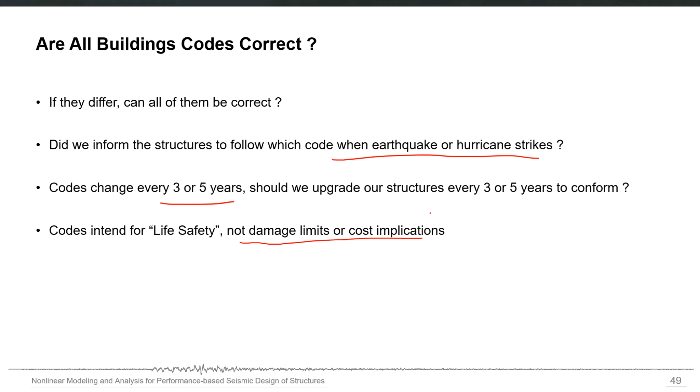Sometimes, especially in underdeveloped or developing countries, they follow different building codes. The practice is mostly governed by more than one code, so there is no consensus about which code to follow. In this case, these questions become more meaningful or significant—what should we do about these codes?

Prescriptive building codes behave like a shelter, because the public is concerned only with one question: will the building be safe? The owner of a particular building will have very specific questions, related to the performance of the building, not about what analysis procedure is being used or what code provisions are being followed. So his question will be very performance oriented.

For example: will the building collapse? Will it be damaged in case of a future earthquake? If that much level of earthquake comes tomorrow, will my building be able to survive? How much repair cost will be required in case of that much level of earthquake? How much time will it take to repair? Can I make a building that will not be damaged and will not collapse in a particular earthquake?

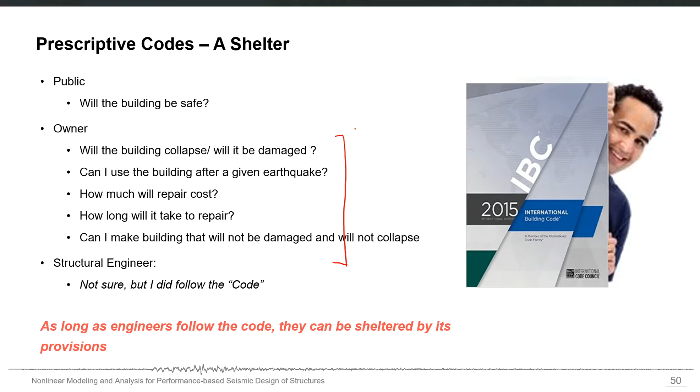Structural engineers, on the other hand, cannot answer these questions explicitly. All they can say is, 'we are not sure, but I did follow the code.' That's why the code serves as a shelter for structural designers—they use it not to answer the explicit questions of building owners, but to safeguard themselves. So as long as engineers follow the code, they can be sheltered by its provisions. The building code implicitly ensures that the performance of the structure will be acceptable if its rules are followed.

The performance may not be acceptable in certain cases. After every big earthquake, we've learned that there are certain things building codes may miss, or certain aspects in which they have limitations. The actual performance of buildings during real earthquakes has shown several limitations in building codes. So after every such realization, we end up changing the rules every few years based on updated understanding, or inventing new rules for updated versions of the building codes, and this process continues as our understanding of these structures increases.

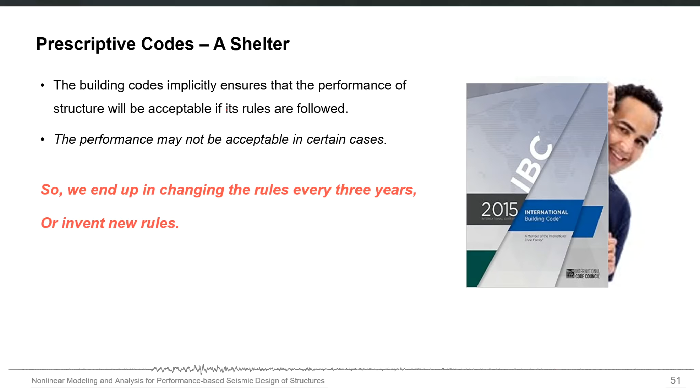Some of the shortcomings we can highlight now are mostly related to the design of tall buildings. For example, most traditional building codes govern the design of normal buildings, such as low-rise and mid-rise buildings. They are not specifically developed for high-rise buildings, and they are prescriptive in nature. The structural systems you can use are limited. I will explain this point in a moment. And it is based on the elastic method of analysis, which is not realistic.

We know already that structures behave inelastically. The real behavior is non-linear, but the code methods are based on elastic methods only. They enforce uniform detailing rules and unreasonable demand distribution rules, for example, and they do not take advantage of recent computing tools. Even though nonlinear modeling or inelastic analysis has become very easy nowadays, the methods are still based on elastic analysis.

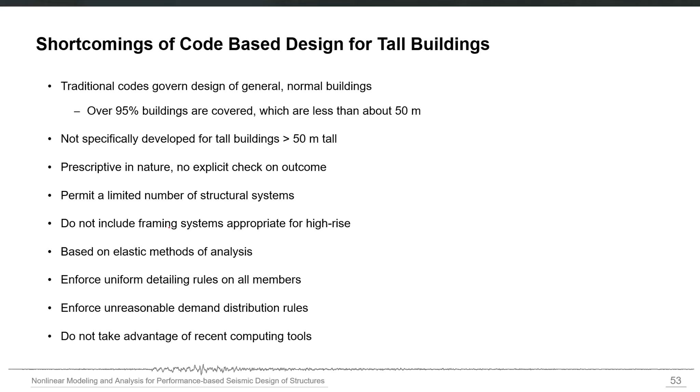To give you an example, if we look at traditional structural systems for high-rise buildings, we have moment resisting frames, shear wall and frame interacting systems, coupled systems, and braced frame systems. These are all traditional systems for high-rise buildings.

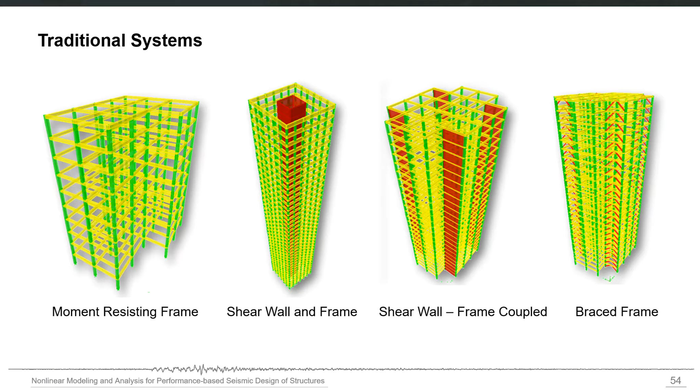Just compare them now with innovative new kinds of structural systems. Nowadays we have tubular systems, diagrid systems with no columns. We have innovative shapes, and different vertically irregular structures or structures with significant setbacks. We have shell structures, and structures which are connected at different story levels. These are all new structural systems being used for high-rise buildings around the globe.

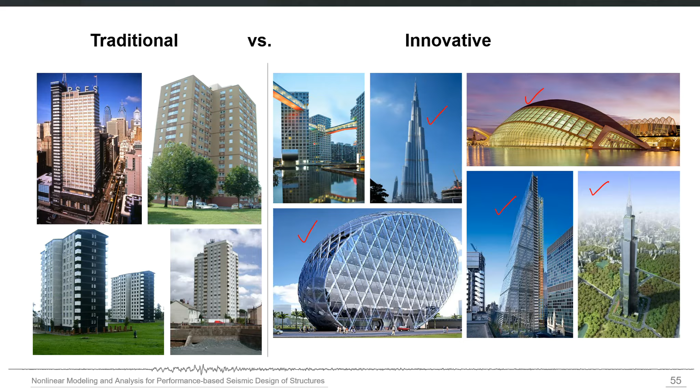The traditional building codes are not intended for these kinds of structures, and we have no option but to use the latest inelastic analysis based procedures, for example, performance-based seismic design procedures for structures like this.

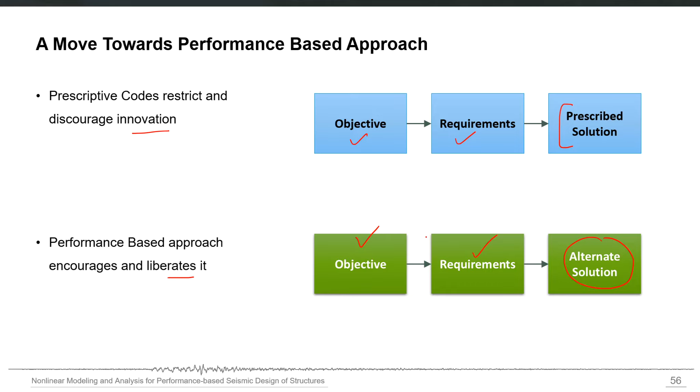So a move towards the performance-based approach is basically guided by all of these facts: prescriptive codes restrict and discourage innovation, but the performance-based approach encourages and liberates. It provides us an alternate solution for the same set of requirements and objectives. So instead of a prescriptive solution, we have an alternate solution where we are free to use inelastic analysis, and our own understanding or real simulation showing the actual behavior of the structure.

The lack of explicit performance in design codes is one of the primary motivations for performance-based design, and it can be used to identify unsafe design. You should be able to tell how the building is likely to perform in extreme events. It enables you to lift the arbitrary restrictions of building codes and provides scope for the development of innovative, safe, and more cost-effective solutions, so you don't need to follow cookbook-type code-based methods or provisions to perform a performance-based assessment.

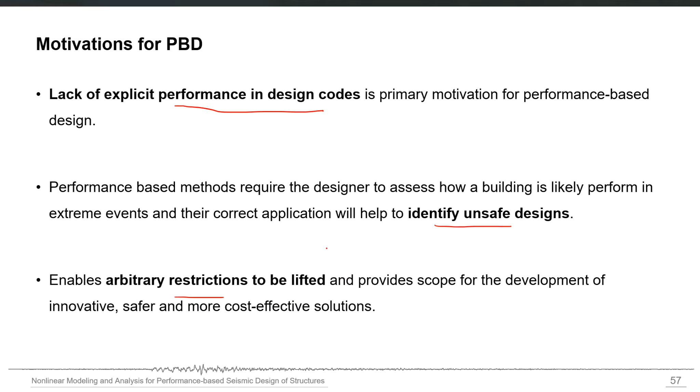So building owners began to question how their buildings would perform in future earthquakes. The primary requirement from building owners is structural performance, and they express their desire mostly in terms of a series of performance objectives. This is now the first term related to performance-based design: performance objectives.

These are objectives set mostly by building owners and the public at large, which should be met by structural designers, and they can be descriptive in nature. For example, I want my existing building to be safe at such a level of earthquake, or I want to be able to use my building right away after an earthquake.

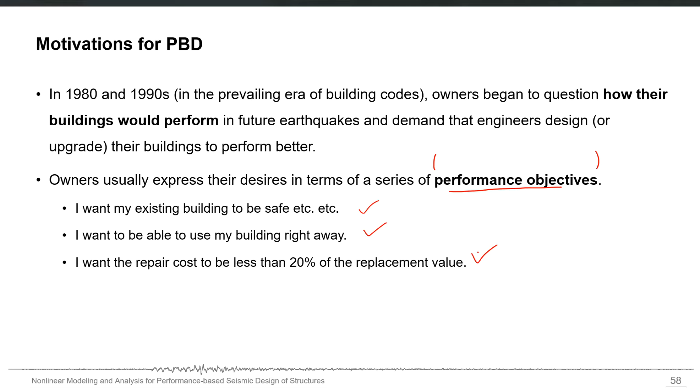I want the repair cost to be less than 20% of the replacement value. This can be one of the requirements or performance objectives set by the building owner or owner's engineer. So performance-based design explicitly answers these questions. It's an approach in which structural design criteria are expressed in terms of achieving a set of performance objectives or levels, not in terms of complying to the letter of the code, and it doesn't care what method, modeling technique, or provisions you used. The ultimate thing is the structural performance. If the desired, agreed-upon structural performance becomes your primary design objective, then the approach is called performance-based design.

So instead of following a step-by-step procedure or certain rules and clauses which implicitly ensure performance, in this approach you explicitly link the performance with earthquake hazard. For example, if the owner asks how much damage will occur in case of a certain level of earthquake, you apply that earthquake to a nonlinear computer model sophisticated enough to capture all the expected damages. That nonlinear model will tell you the actual damage you're going to have, and then you'll be able to explicitly answer that question for the building owner or any other stakeholder.

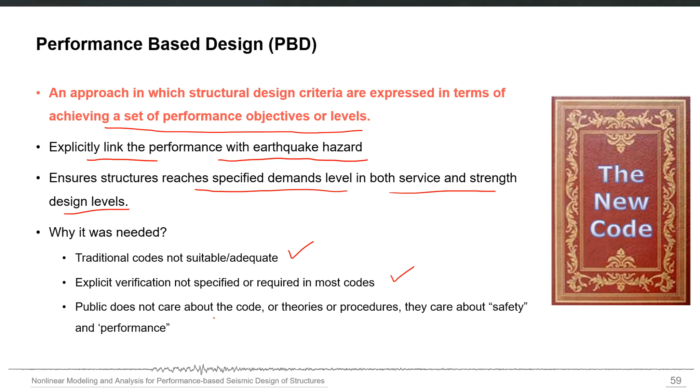So the essence of PBD in one line: a decision maker states a desire that a building will be able to perform in a certain way. A decision maker can be a building owner, a government authority, or any other stakeholder who states a desire that the building should perform in a certain way. That decision maker should be able to set the performance objective, which can be, for example, to protect life safety, minimize potential repair cost, or minimize disruption of use, for example in case of an earthquake.

The engineer uses his or her skill to provide a design that will be capable of achieving these objectives. That's all PBD is in one line: performance is all the designer should be worried about. And how can he ensure this? By using nonlinear analysis, by going beyond the code, and by using procedures which code writers may not intend for common buildings. He should be able to perform nonlinear analysis and do nonlinear modeling as well.

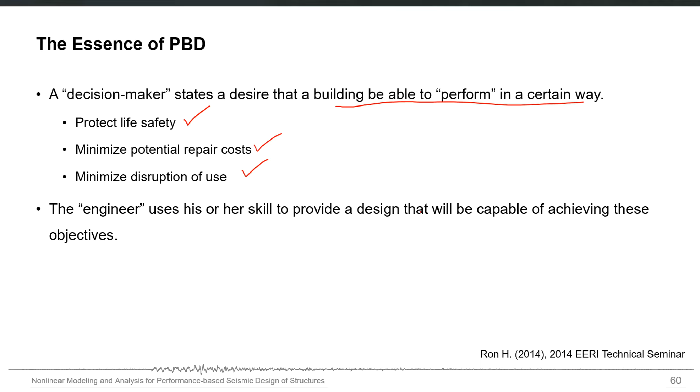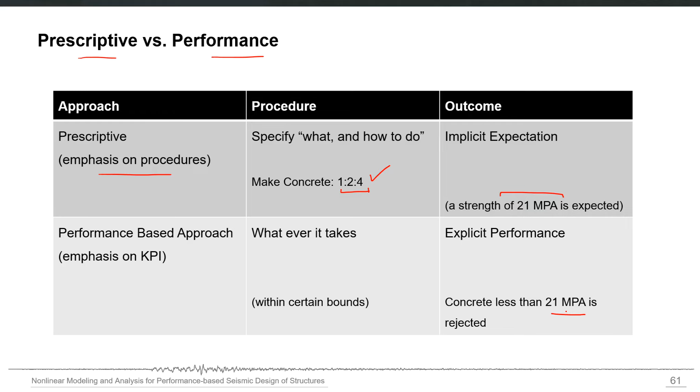To give you an example of a prescriptive approach versus a performance approach: a prescriptive approach emphasizes procedures. For example, it will say you can have a concrete mix of 1:2:4 to achieve a strength of 21 megapascals — you just mix it in these proportions and it's expected you will get that strength. On the other hand, the performance-based approach emphasizes key performance indicators. It will simply say that concrete less than 21 megapascals is rejected. It doesn't bind you to how you achieve that 21 megapascals — that's all that is required. It won't give you a cookbook-type recipe to get that strength. The same applies in structural design.

For example, a performance objective is set, and that objective is a combination of two things. First, a hazard level — a ground motion with some probability of exceedance in 50 years or some other period, for example 2% in 50 years or 10% in 50 years, some definition of ground motion — plus the expected performance at that ground motion. So a performance level is the maximum acceptable damage given that this ground motion occurs.

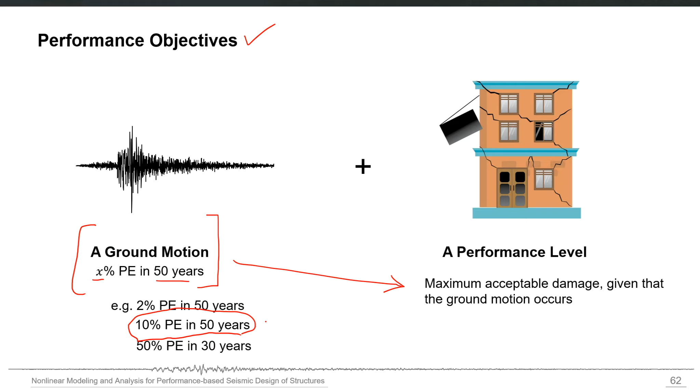For example, if I say that I want only my non-structural elements to crack in case of this level of an earthquake, say 10% probability of exceedance in 50 years, the only damage I am going to accept is the cracking in non-structural walls. Now this statement becomes your performance objective. You give this statement to the structural designer, and he should be able to ensure, using the performance based approach, that

this performance objective is met. There are some standard performance levels used in the context of performance based design, and they are also defined descriptively in different standards. For example, the very first performance levels are operational, immediate occupancy, life safety, and collapse prevention. These are the four standard performance levels which can be used to have a meaningful discussion with the decision maker or primary stakeholder, maybe the owner of the building.

Operational means your structure is not going to have any damage, or it will remain exactly intact after an earthquake. Immediate occupancy means it will have some damage, maybe minor damage, but you will be able to occupy it immediately after an earthquake—so almost no damage. Life safety means there can be some damage, but there will be no loss of life. Collapse prevention means there can be significant damage, but the structure as a whole should not collapse—it should still remain standing.

These four performance levels are widely used nowadays to describe different performances of a structure under different loads. For example, the owner can say that at 10% probability of exceedance in 50 years, this level of earthquake, I want this performance level. But at 2% probability of exceedance—a very low probability, very rare event—I may allow this other one. This is still acceptable in case of a very rare earthquake, but for a 10% probability of exceedance, I need this one.

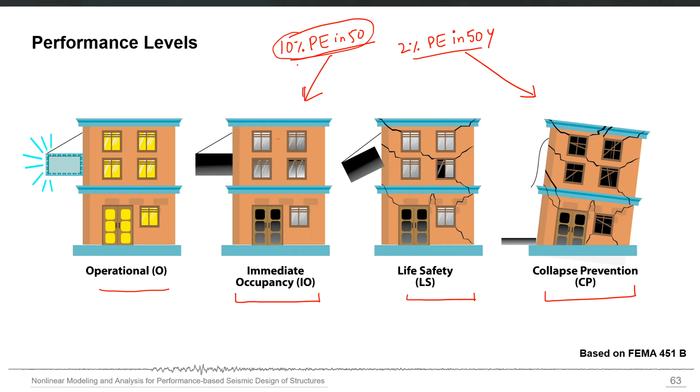Definition of a hazard level and the description of the damage, the performance level—this combined becomes the performance objective.

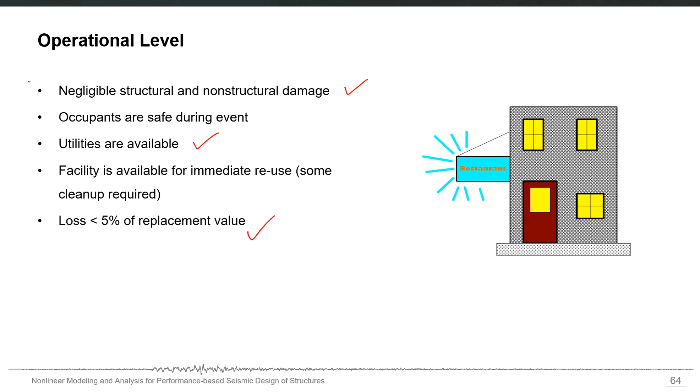Operational level means negligible damage, almost no damage, utilities are available, and the loss is less than 5% of the replacement value—this is the description of what operational level means. Similarly, this is the description of immediate occupancy, that structural damage should still be negligible and there can be minor non-structural damage.

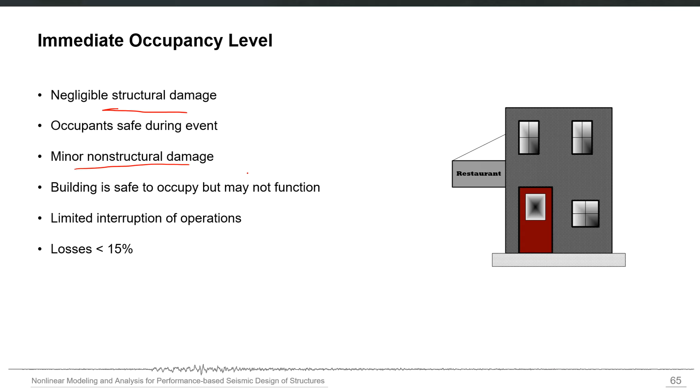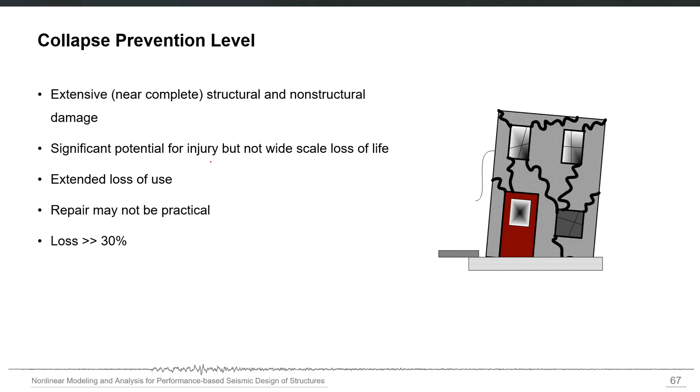Similarly, life safety can have significant structural damage. Someone can be injured, but the structure should be overall safe. The building is not safe for reoccupancy until repaired, so there will be some repair required at this life safety level. The collapse prevention level allows extensive damage, but the structure as a whole should not catastrophically collapse.

By the way, this life safety level is the intention behind code based design. The codes as a whole are basically based on the idea of public life safety—their intention is that no loss of life should be permitted as part of the design philosophy, but significant or extensive damage can be allowed.

But in some cases, for example the 2011 Christchurch earthquake in New Zealand, we have an example where the life safety level intention of building codes failed significantly, in that most buildings were at life safety level but had significant non-structural damage as intended by this approach. Because of that non-structural damage, the buildings remained uninhabited or were not functional, and there was significant repair time and repair cost—so the intended function of the building was lost after this earthquake.

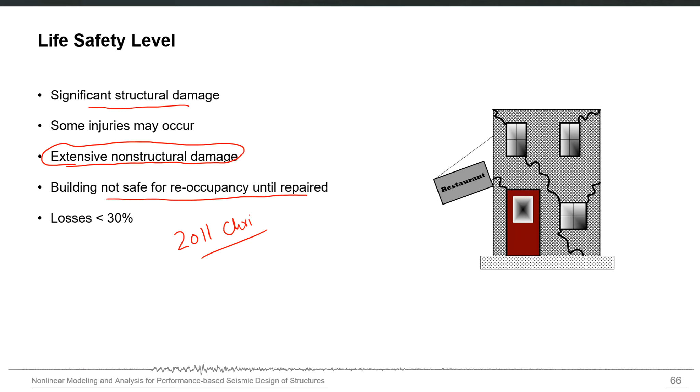So they were still at life safety level. These kind of real earthquake structural performances give us an idea of what is further required, or how we should further improve our understanding of structural behavior and safety.

The first generation of performance-based design methodology was mostly based on nonlinear static analysis procedures, also called pushover analysis, because nonlinear dynamic analysis some 20 or 25 years ago was not that common. The computational power required to perform a detailed nonlinear dynamic analysis was not mostly available.

So the performance-based methodology at that time was using nonlinear static analysis or pushover analysis. In fact, the example of overlaying the demand to the capacity given earlier in these slides was also based on the idea that we can push the structure laterally to get the nonlinear capacity of the structure in the form of what we call the pushover curve, the relationship between the lateral base shear and the roof displacement.

But nowadays, the next generation of performance-based design is explicitly based on the nonlinear dynamic analysis, what we call the nonlinear response history analysis, or also known as the nonlinear time history analysis. So that is now at the very core of performance-based design methodology.

So we now have these four standard performance levels: operational, immediate occupancy, life safety, and collapse prevention. Once we have the structural damage classified under these four categories, we can also relate that damage to any other loss, for example economic loss or repair cost.

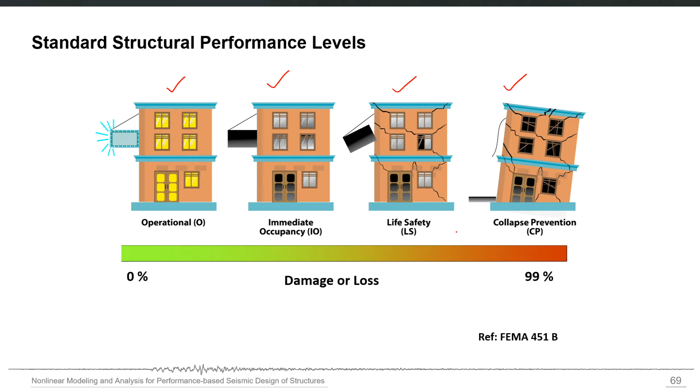We can also relate it with the consequences of this much damage, and some other parameters such as downtime, how much repair time will be required, and how long the facility will be shut down.

For example, if we take the hazard measure or loading severity on the y-axis and the structural displacements or deformations on the x-axis, we can also put these performance levels on this curve.

If you are operational, which means you are somewhere in the straight line region but have some minor damage, maybe non-structural damage only, then you can have some degradation in the stiffness of the structure. But if you are at the life safety level, that means significant damage has already started.

And if you are at collapse prevention, that means you are just at the verge of complete collapse of the structure. So these four performance levels can also be related to the demand side of the analysis.

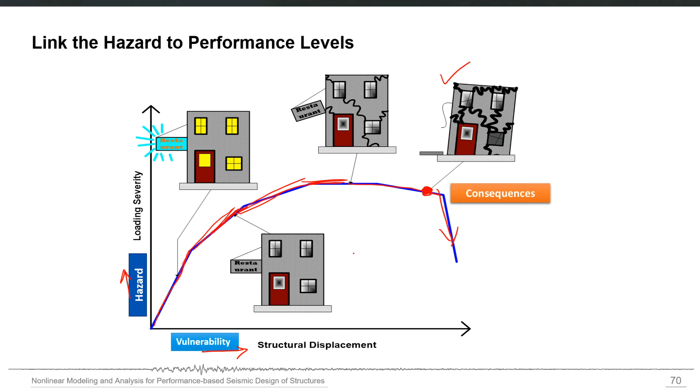You can say that the demand and capacity can all be related to these four performance levels. So for example, if I say collapse prevention of the structure, you should know clearly that you are somewhere towards the end of your force-deformation behavior, or the loading severity versus structural deformation behavior.

So this is the idea: if you have the damage already told by the nonlinear analysis, or predicted by the nonlinear model, you can convert it into any other loss. For example, you can even convert it into the number of casualties expected during that earthquake. There are models available which convert your structural analysis results into expected number of casualties or injuries.

There are models available which can convert your structural analysis results into downtime or rehabilitation time. You can calculate the rehabilitation cost, or the required cost to restore after an earthquake event. And obviously you can also calculate the other consequences or results of that particular earthquake which you have applied and got that performance of the structure.

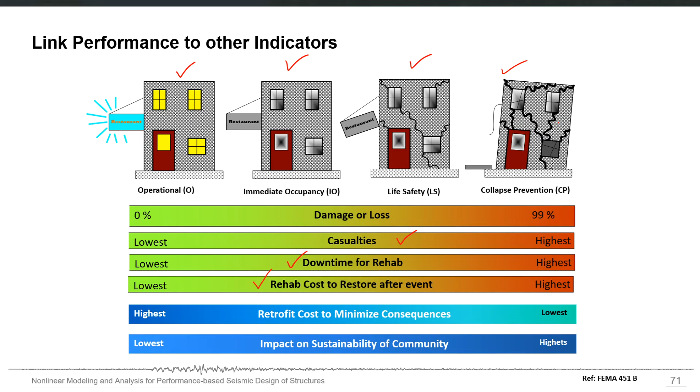So performance-based design can be applied to any type of load, but is typically suitable and targeted for earthquake loads. The concepts incorporated are that you check the performance not at one level of an earthquake, but at multiple levels. You use multiple seismic events to check the seismic performance and give the complete picture to the building owner or the decision maker.

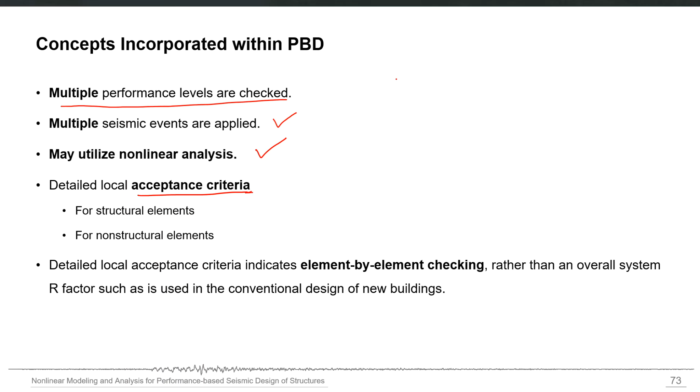The most important point is that you should use the nonlinear analysis, with detailed local acceptance criteria. Acceptance criteria is a new term for you now - it means what level of structural seismic demand is acceptable for you. For example, at the IO level, I can have a roof drift or roof displacement of 2 centimeters, and that is acceptable for me.

And for life safety, I can have 5 centimeters. So these numbers, corresponding to different performance levels, are your acceptance criteria.

For example, if you have done the nonlinear analysis already and you get the roof displacement, and that came out to be, let's say, 7 centimeters, you should know already, using that acceptance criteria, that you are already beyond life safety. So the acceptance criteria are the capacities, or the criteria, which should be compared with the demand results or the analysis results in order to come up with the seismic performance. So even when you compare this 7 centimeters coming from the analysis with this criteria, you will come to know that you are beyond life safety, and that will become your structural performance.

And you will not do it for one full structure at once. It will be done for each element separately. Each structural or non-structural element will be checked separately after the analysis, and compared with a well-established acceptance criteria, and that criteria should also be agreed upon between the decision maker and the building owner and the architect, all the stakeholders, including the structural designer obviously. So that criteria will basically convert your structural analysis results into performance.

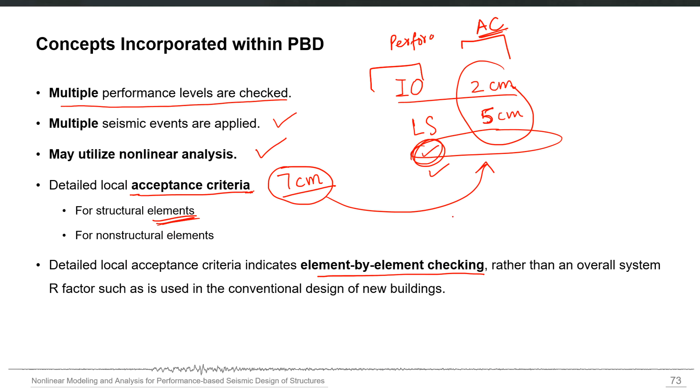So that element-by-element checking after the analysis will give you the overall performance of your building - whether your shear walls are going to crack or not, whether your particular beams or columns are going to yield or not. All of these real-time acceptance criteria will be applied to your structure after the analysis, and you will get the structural performance in a way which will be understandable by all stakeholders, not only by structural engineers.

So by hazard I mean the intensity and characteristics of ground shaking, and it can be deterministic or probabilistic. The example which I was giving earlier was the probabilistic definition of the hazard.

For example, I was saying that there's a 10% probability of exceedance in 50 years. This is my definition of future earthquake loading, which means that in the next 50 years there is only a 10% chance that a loading more than this will come. So 10% is my acceptable risk level, you can say. So I'm defining the earthquake ground motion in terms of a probabilistic framework.

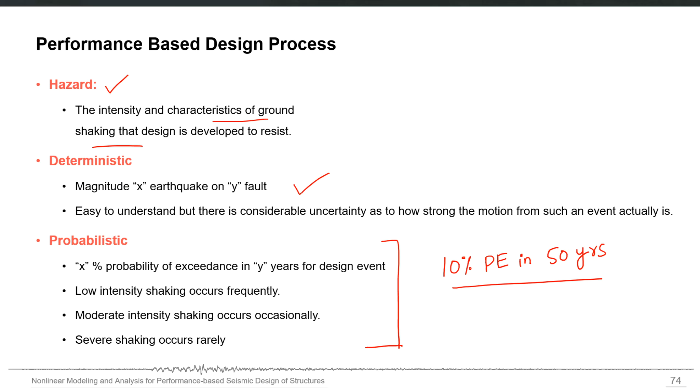It can be deterministic also, but nowadays it is not used much. Deterministic would mean, for example, this much magnitude earthquake on that much fault. People, by the way, still use the deterministic definition of seismic hazard, but nowadays we mostly use the probabilistic definition in terms of performance-based seismic design.

So I mentioned that we use more than one level of seismic hazard in the PBD methodology. These two levels, or we check the performance objectives at these two levels explicitly, are service level assessment and collapse level assessment. We use a low level earthquake called the service level earthquake, SLE, which has a definition of 50% probability of exceedance in 30 years. And then we have a collapse level assessment which has a definition of 2% probability of exceedance in 50 years, which corresponds to a return period of 2500 years.

For service level assessment, we use a low level, frequent earthquake, which has a return period of around 50 years. So we not only design our structure on the design basis earthquake, we then check the performance of the structure explicitly at two other levels: one lower than the design level, called the service level assessment, and one more than the design level, called the collapse level assessment, which is done at the MCE level, the maximum considered earthquake level.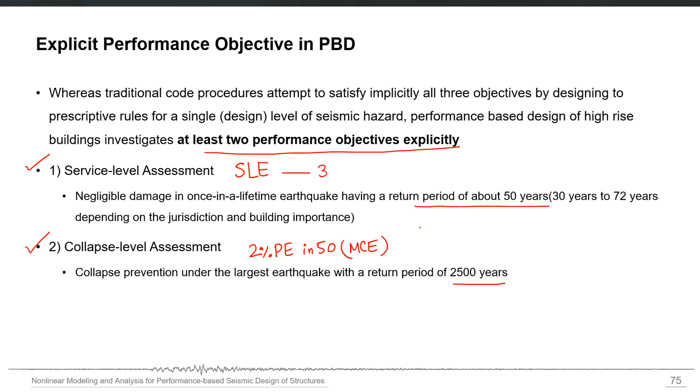And the requirements from the structure in terms of performance are different in both of these assessments. So for example, for service level assessment, we have a requirement or expectation that there will be no damage or negligible damage with frequent hazards.

So this is a frequent level earthquake which can have around 50 years of return period. But here in collapse level assessment, we have the largest earthquake with a return period of approximately 2500 years, and our expectation is that collapse prevention under extreme hazards should be the performance objective.

For example, here we should have the IO level, and here we should have the CP level. So the life safety level will be somewhere in between these two, service level and collapse level, and that is intended for life safety level. So we design for life safety.

We can start the design using code level, and we follow the building code to come up with a starting design, and then we can check explicitly the performance of that design at a low level earthquake and a high level earthquake, with different expectations at both levels. If the structure fulfills those expectations, then we are good to go.

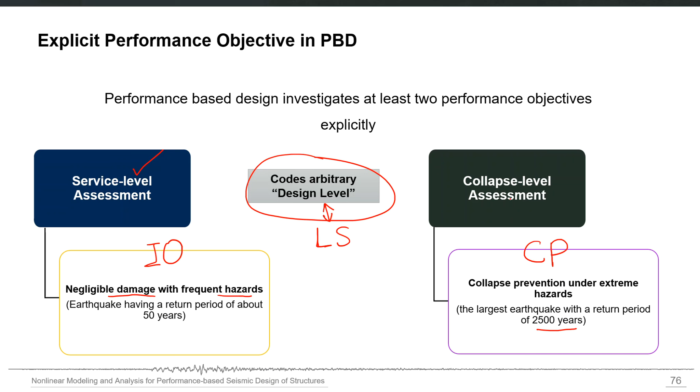So the performance objectives, for example for this frequent service level earthquake, can be that the structure should remain essentially elastic with minor damage to structural and non-structural elements. For the maximum considered earthquake, the performance objective can be that extensive structural damage is allowed, repairs are required and may not be economically feasible.

But the structure as a whole should be at collapse prevention level. It should not catastrophically fail. In between these two is the design basis level, and that is the code level.

The code's intention is that moderate structural damage is allowed and some extensive repairs may also be required, but there should be no loss of life. So the life safety performance objective is intended for building codes.

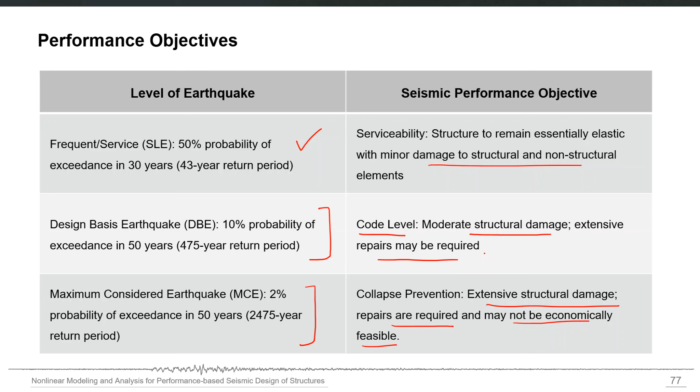These are some of the concepts which we have already discussed. Both client and engineer must be satisfied. The acceptance criteria, which will convert your analysis results into the building performance, should be agreed upon between the client and the performance-based design engineer.

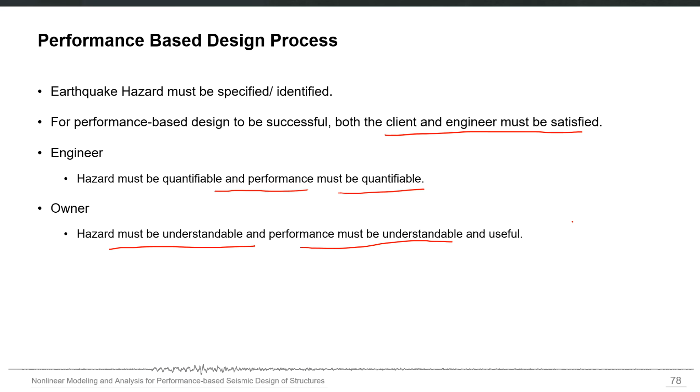The hazard must be quantifiable and performance must be quantifiable so that we can explicitly answer the questions asked by the building owner. For the building owner, the hazard must be understandable and performance must also be understandable and useful. So this will be a win-win situation for both engineer and owner, in which they can have a meaningful discussion about the structural expected performance.

So all the questions of the building owner—will the building be safe, will I be able to use it after the hazard, or what will be the repair cost—can be answered in terms of the amount of yielding, buckling, cracking, permanent deformations, and other demand quantities which can be explicitly calculated using nonlinear analysis. So all the answers can be provided to the building owner.

But there is an additional thing here, and on that I will end this session before we go to the question and answer session, and that is the peer review. The performance-based methodology requires a peer review for this assessment, and it should be a third party, and that third party should ensure public safety and realistic performance.

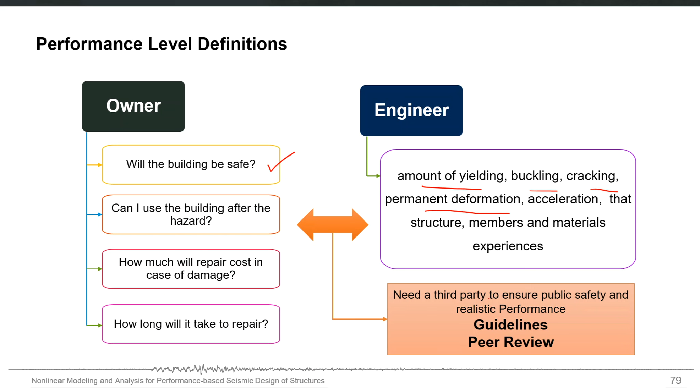So the purpose of that peer review is to enhance structural performance, to improve cost effectiveness, and these objectives are to be achieved through better structural system selection and use of advanced design methodologies and tools.

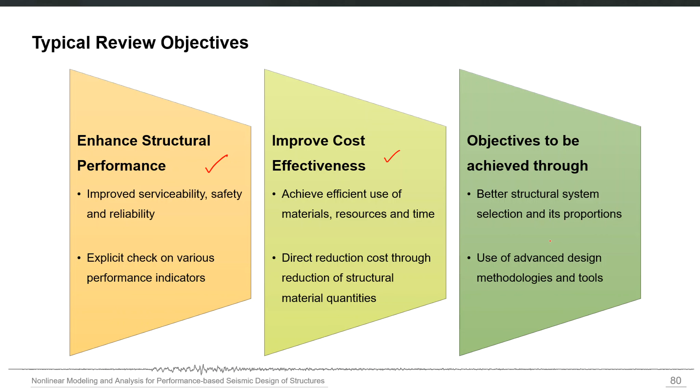Some of the components of a typical review are, for example in case of performance: dynamic response parameters, lateral response, vertical load response, DC ratios in terms of displacement and forces, response irregularity, or whether some explicit performance evaluation is done or not.

In terms of effectiveness, the objectives of a typical peer reviewer will be to use the capacity utilization ratios—these are the ratios that tell how much capacity of the element or material is used by the demand and how much is the reserve—along with reinforcement ratios, their volume, rebar quantities, and the time and accommodation of other constraints. So both aspects are checked in the peer review: enhancement of performance and cost effectiveness.

So I will end this session here and I will have a question and answer session. In the next session, we will discuss some of the key components of performance-based assessment and design, and some example results you will get if you apply this methodology to new and existing structures.